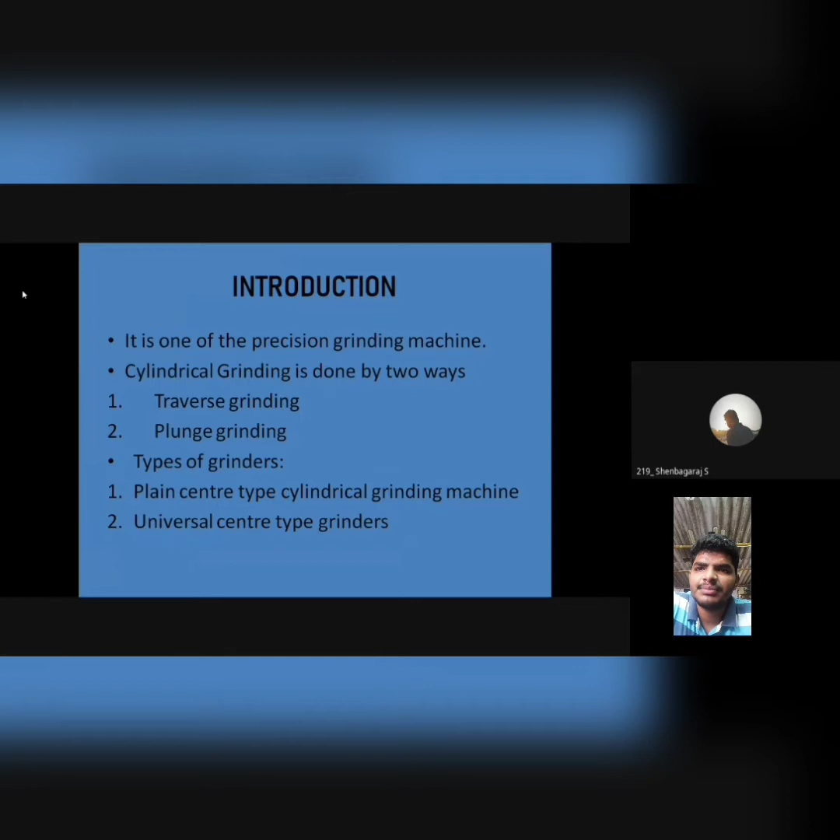The principle behind this process: the workpiece is held between two centers and rotated by a dog on the faceplate. The grinding wheel rotates on its own axis in the opposite direction of the workpiece, and the rotating grinding wheel is fed against it.

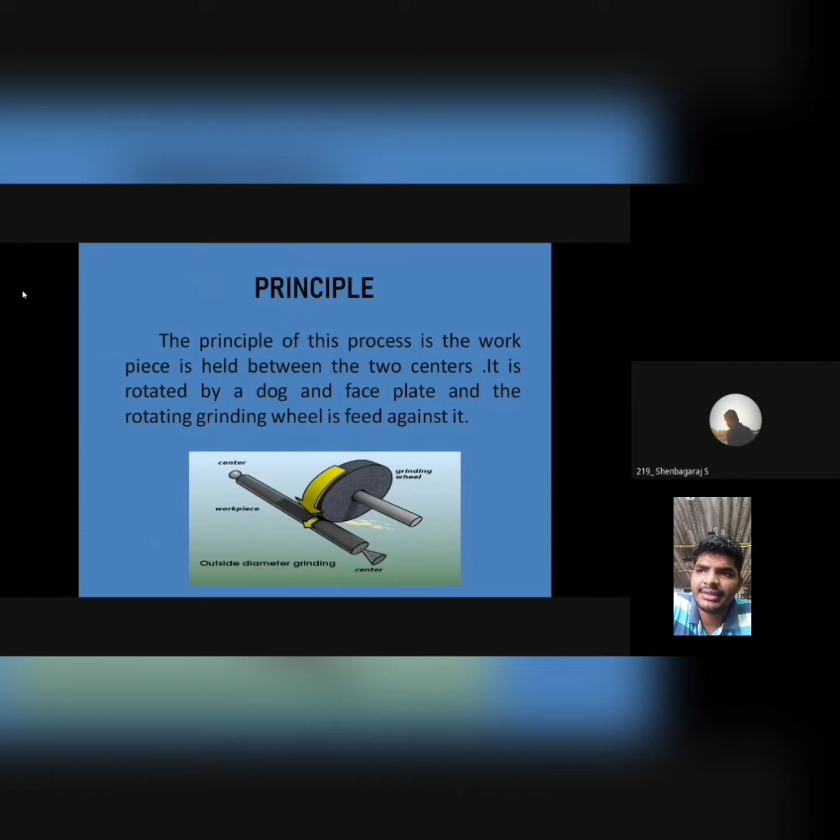There are four movements involved in this process: rotation of workpiece, rotation of grinding wheel, movement of the workpiece towards the grinding wheel, and movement of the grinding wheel.

As already said, the operation is done by two ways. One is traverse grinding, which we can see in the slides. This method is used when the length of the workpiece is greater than the width of the grinding wheel. In this method, the grinding wheel rotates in a fixed position, while the workpiece rotates and also moves in traverse motion.

Let's see this image. You can get some idea about traverse grinding from this image.

I added a small video clip for traverse grinding. Let us see the video in the next slide.

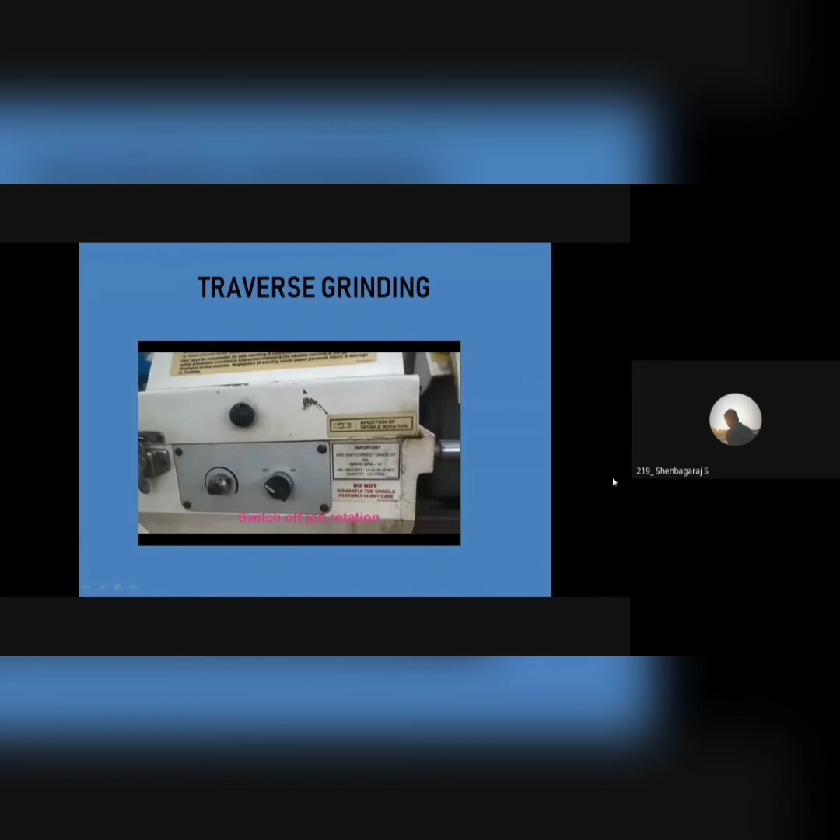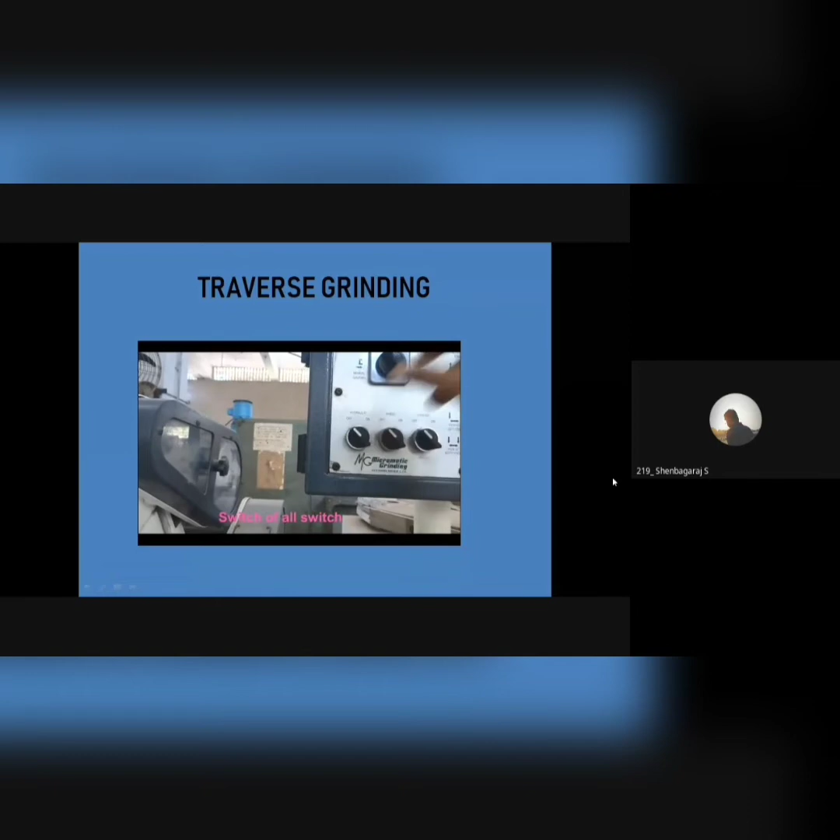Let us see plunge grinding. This method is used when the length of the workpiece is lesser than the width of the grinding wheel. In this method, the longitudinal feed of the workpiece is not needed; only the transverse feed is enough, because the width of the grinding wheel is greater than the length of the workpiece.

See this image, you can get some idea about plunge grinding. I also had a small video clip for plunge grinding, so let us see in the next slide.

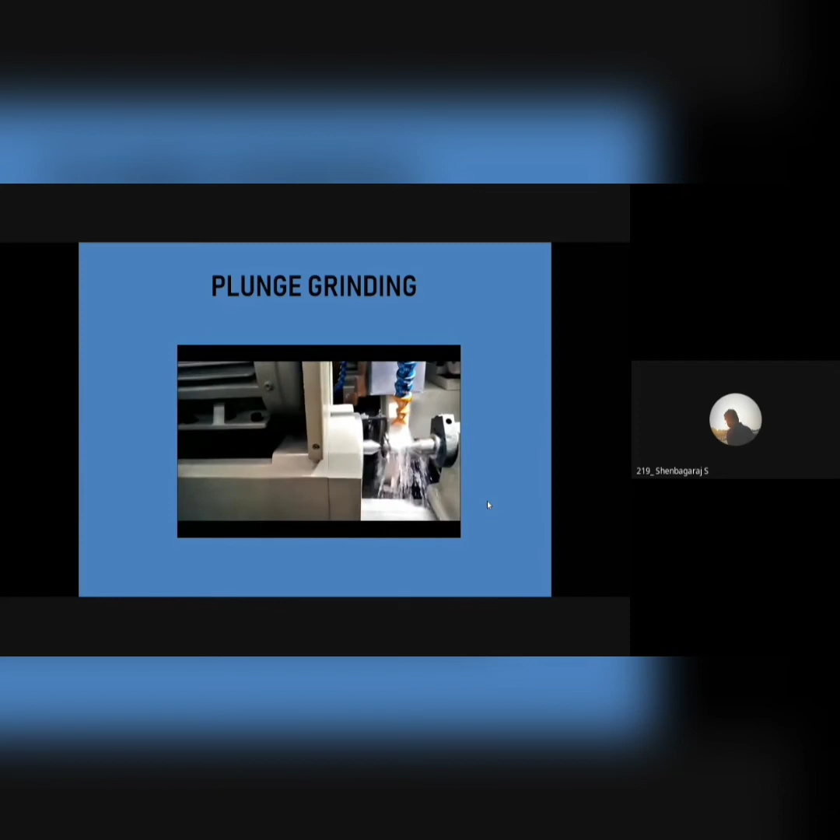In this slide we can see about the plain center type cylindrical grinding machine. These machines look like a center lathe in many aspects, having a headstock and tailstock. The workpiece is held between the two centers, and a disc type grinding wheel is used.

In this machine, both operations, traverse grinding and plunge grinding, can be carried out. The parts of the machine are: table, base, headstock, tailstock, and the wheel.

The lower portion is called the base, and the dotted line indicates the bed guideways. The lower table slides on the bed guideways, and the upper table is mounted on the lower table. Dogs are provided at the sides of the tables to reverse the table at the end of the stroke. The headstock and tailstock are mounted on the upper table.

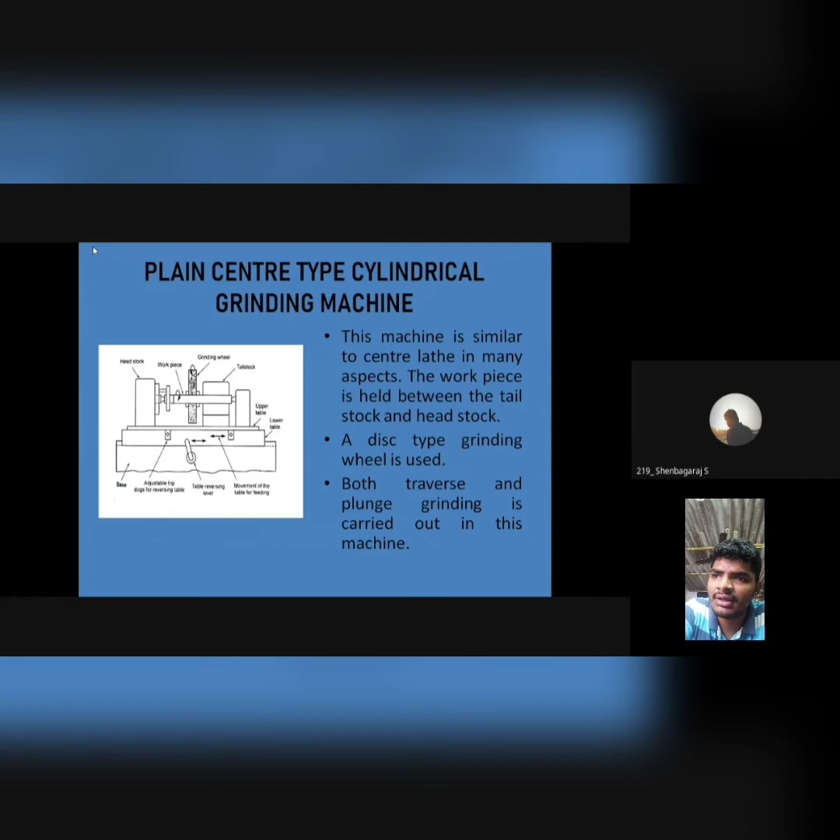The headstock carries the motor to rotate the workpiece. The grinding wheel is mounted on the wheel head, and it is driven by the motor housed in the wheel head.

In this slide we can see about the universal center type grinders. The basic construction of universal center type grinders is the same as the plain type cylindrical machine. However, some attachments and advanced features make it suitable to execute more machining processes.

The principal difference between the two is that both the wheelhead and the headstock can be swiveled to the required angle in the universal center type machine, but the plain type machine does not offer this feature.

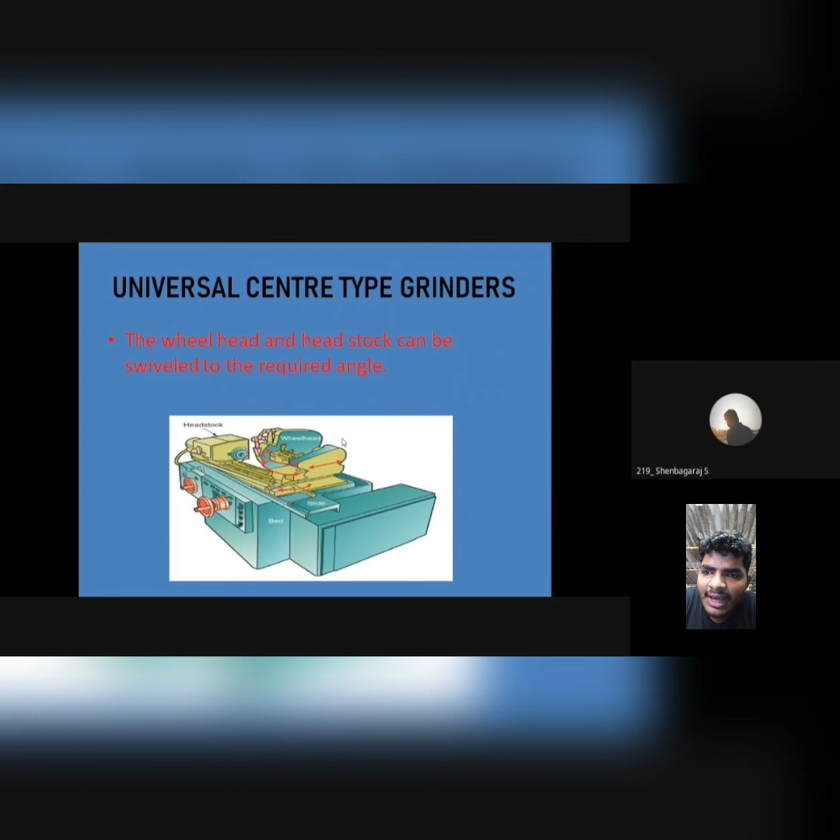Just look into the picture. The direction of movements and the angles have been mentioned in this picture by the red arrows.

The universal center type grinders are classified into two types regardless of the applications, and below are the various operations possible in inside diameter and outside diameter universal grinding.

These include cylindrical traverse grinding, form grinding with table traverse, plunge cylindrical grinding, taper grinding by tilting the table, taper grinding by tilting the wheelhead, surface grinding by swiveling the workhead, and face grinding.

We can also do taper plunge grinding using special attachments. The outside diameter grinding means grinding done on the outer surface of the object, and inside diameter grinding is used to grind the inner surface of the object, where a collet is used to hold and rotate it.

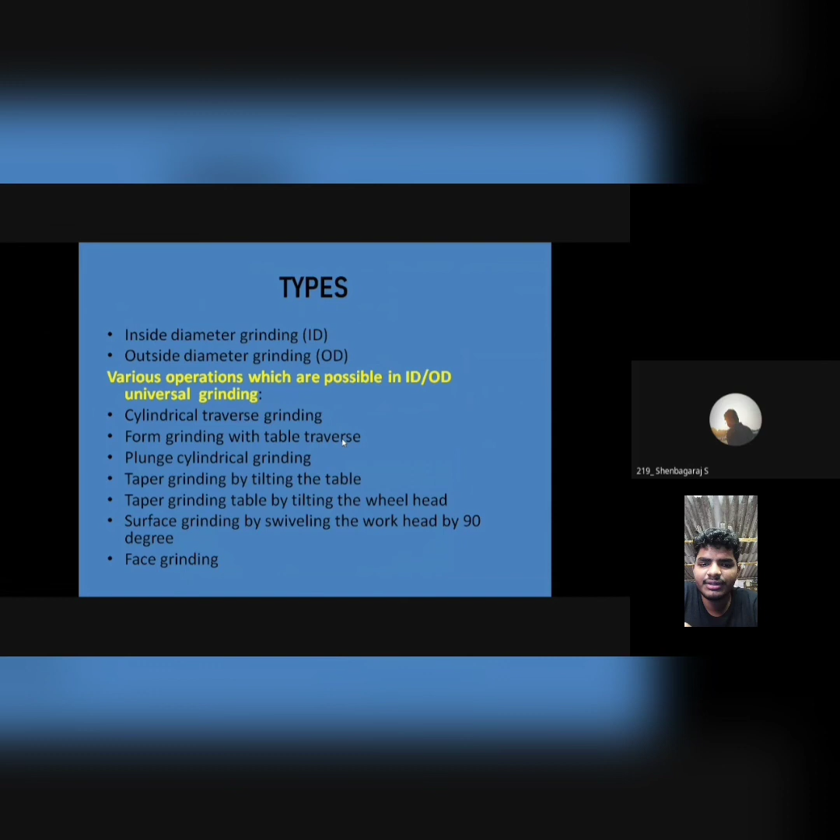The machine also offers some following features: the center of the headstock spindle can be used live or dead, and as already said, the wheelhead and headstock can be swiveled at any angle, and the wheelhead can be arranged for internal grinding.